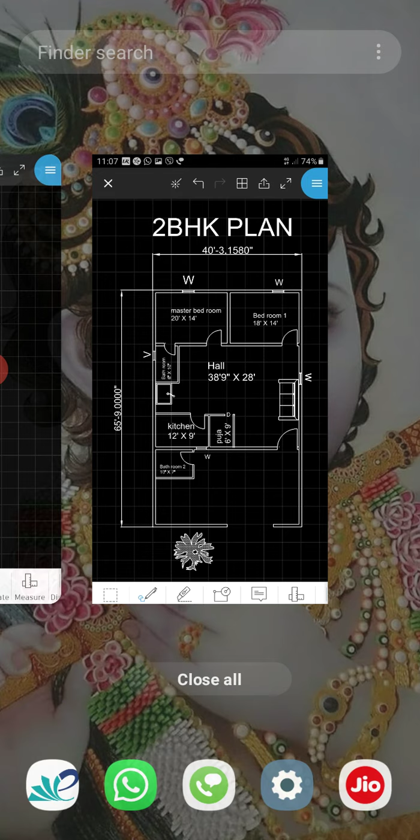Go to draw option, choose rectangle, 40 feet 3 inches by 65 feet 9 inches. Delete. Go to draw option again with the same dimension.

Now provide wall thickness by offset. Here give the dimension 9 inches. Select the object, go to offset, provide 9 inches wall thickness.

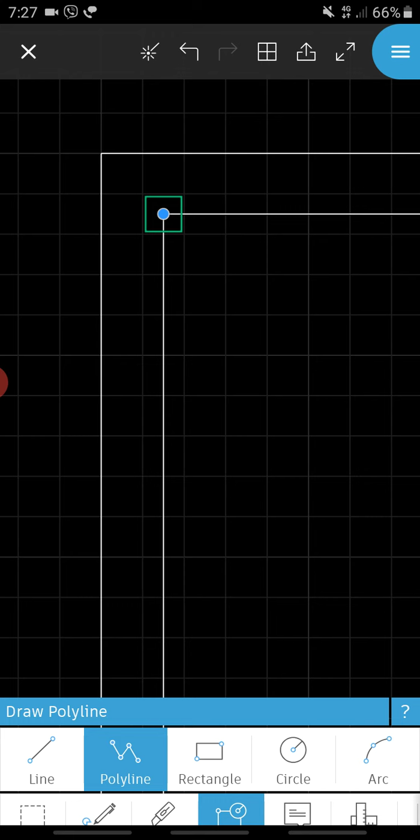Next, we have to choose master bedroom dimension 20 feet by 14 feet. Go to draw option, select polyline. Here vertical dimension is 14 feet 0 inches.

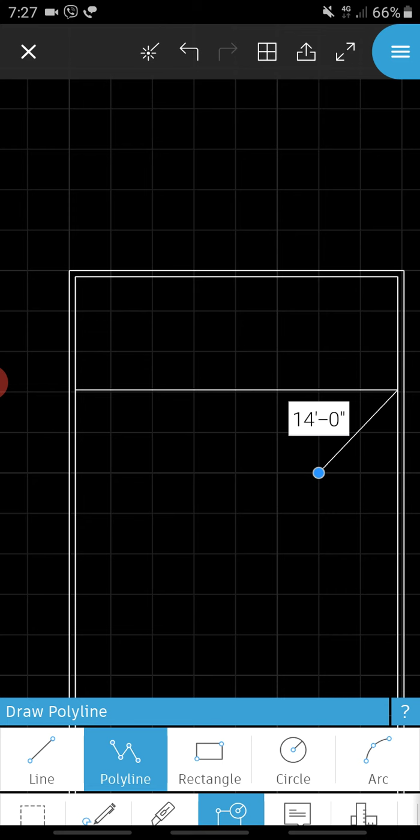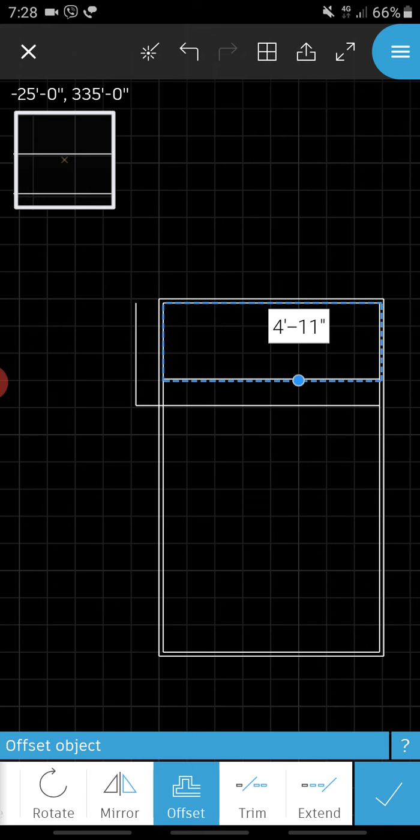Go to quick trim option, trim this line, and select the object. By offset we provide the wall thickness here. You have to delete, select the object. By offset provide wall thickness of 9 inches, and also select.

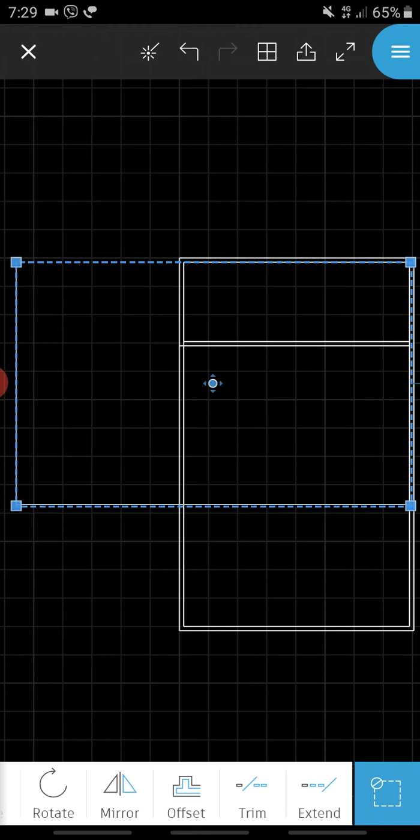So we have to take 28 feet 0 inches. Let's provide the same wall thickness. Let's take offset, provide 9 inches wall thickness.

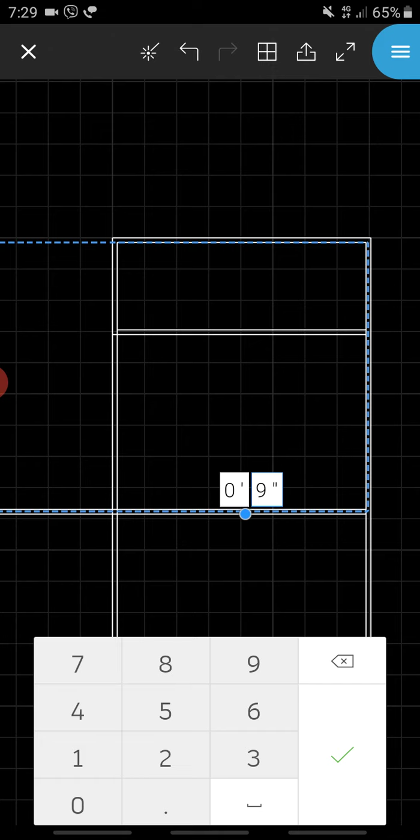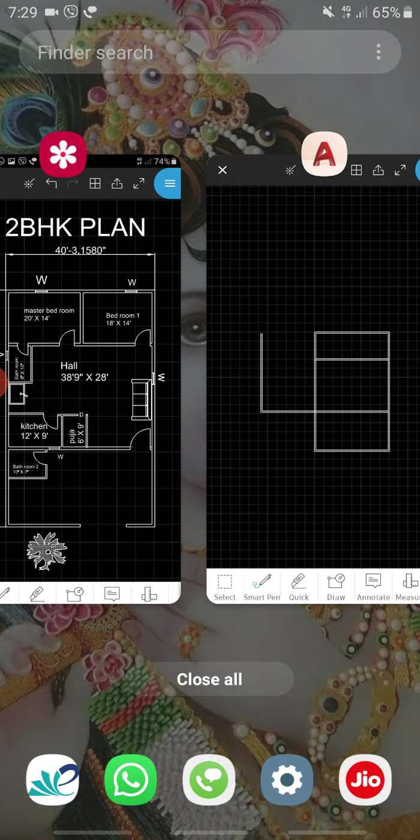Next, we have to draw the rooms. Let's provide more rooms. Master bedroom 20 feet by 14 feet. We have to provide master bedroom. Go to draw option, select polyline.

From this corner point give the dimension 20 feet, it's a horizontal dimension, 0 inches. Vertical dimension is 14 feet.

Next, quick trim, remove this line. By offset let's provide wall thickness here. Select this object, go to offset, provide 9 inches thickness of wall.

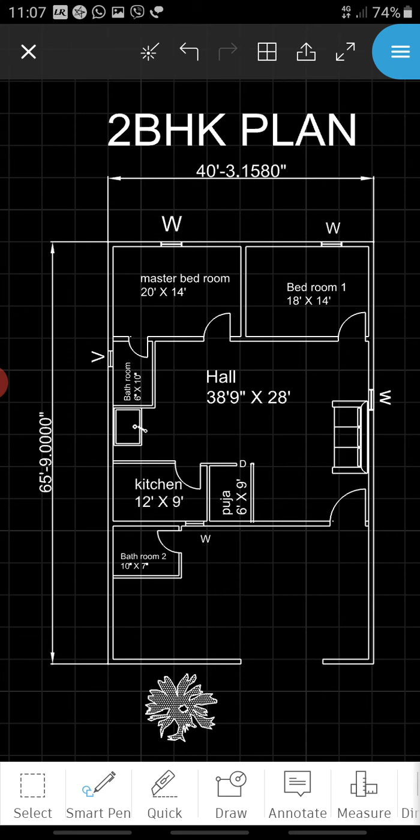Next, let's check our plan. Here is bathroom 1, 6 feet by 10 feet.

Go to draw option, select polyline. From this corner point onwards, give the dimension 6 feet, it's a horizontal dimension. From vertical it's 10 feet.

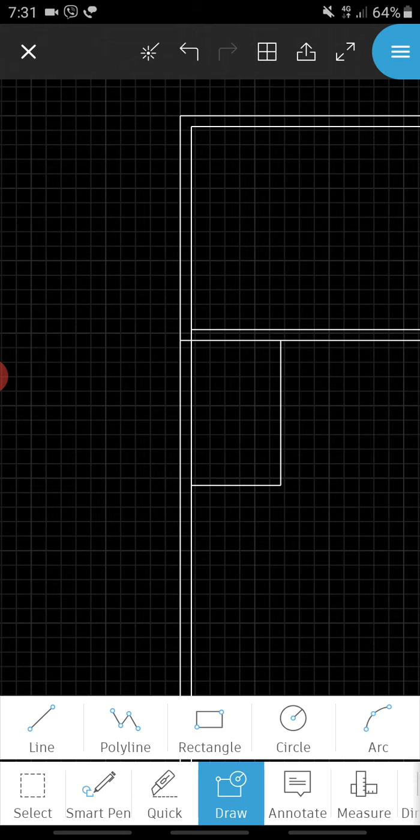By offset let's provide wall thickness. For bathroom, 0 feet 4.5 inch. It's a partition wall only.

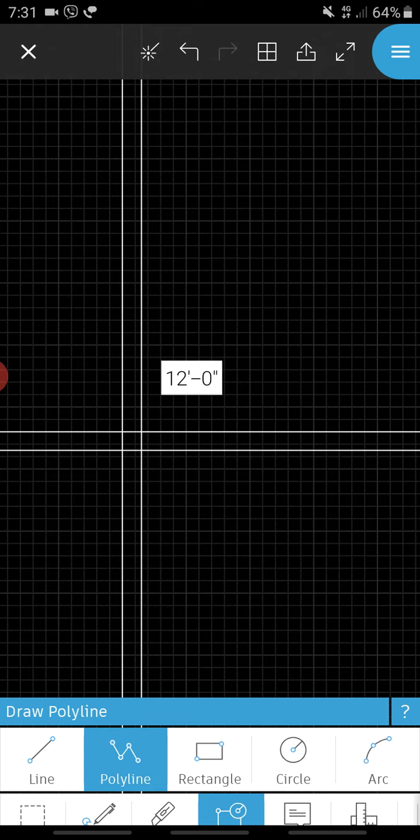Okay, go to draw option, select polyline. From this corner point onwards, 12 feet. Horizontal dimension is 12 feet 0 inches, and the vertical is 9 feet 0 inches. Okay.

Next, go to polyline, from this point onwards join this line. Sorry, here we have some error, so remove this line. Go to draw option, go to polyline.

By offset we have to provide wall thickness. Go to back, select this line, go to offset, for kitchen 4.5 inch. Let's give wall thickness here too.

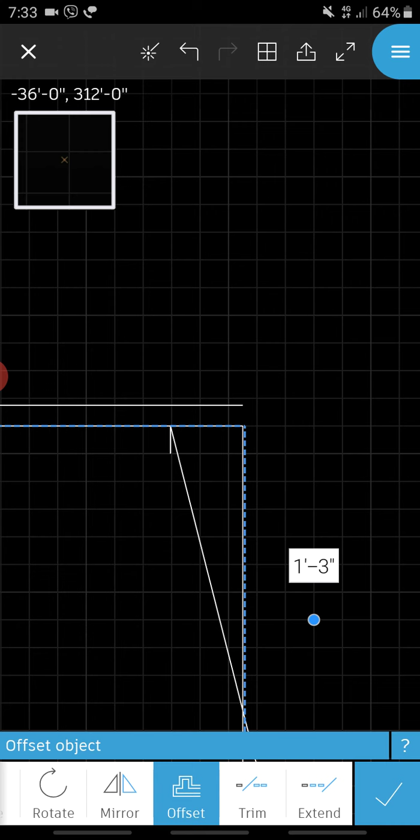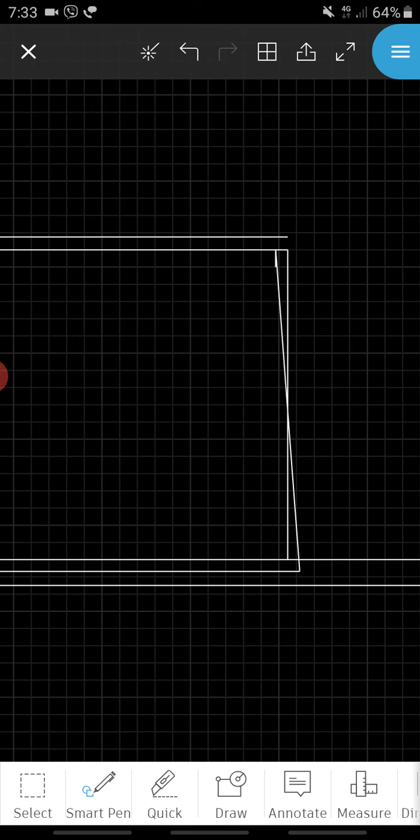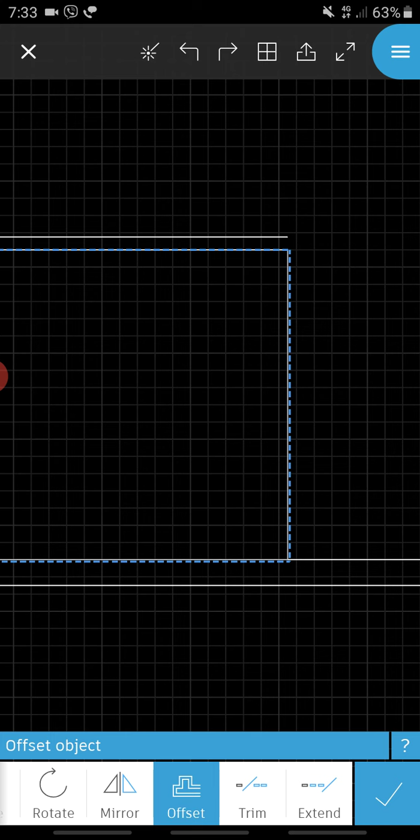Here is a small error. No, go to back. Select this object, go to offset. Offset 4.5 inch.

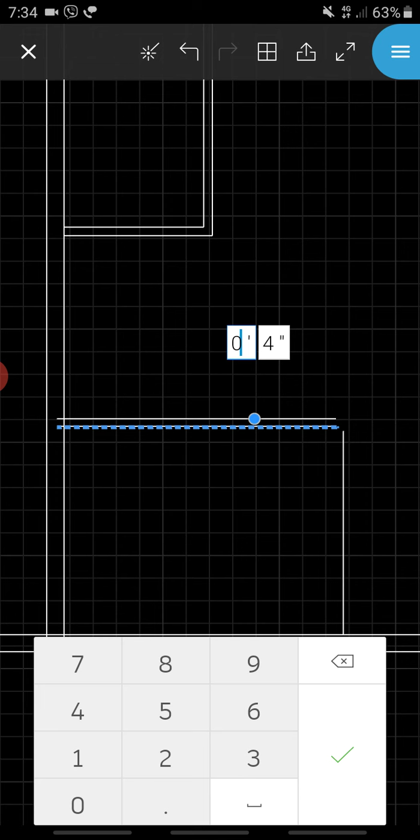Here is a small error, okay we can check it. Extend this line 4.5 inch, so remove this line, provide this line for offset 4.5 inch. Offset 4.5 inch. Delete this one.

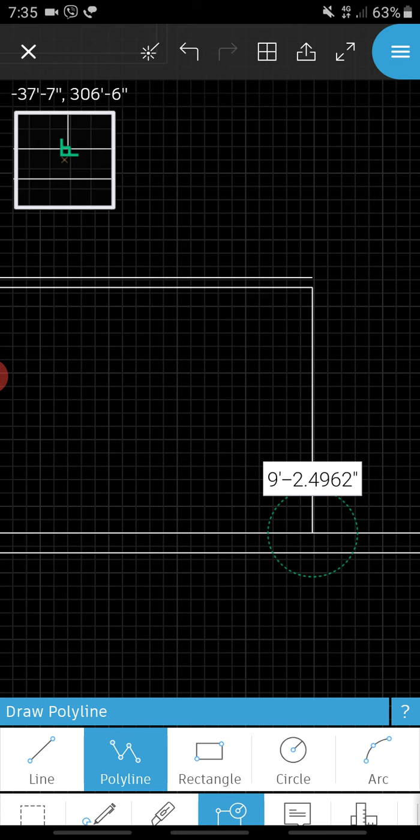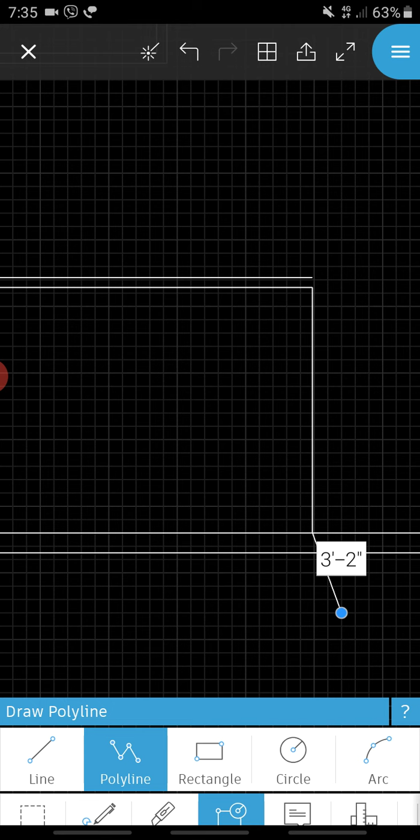Go to draw option, select polyline. Select this object, take offset, it's 4.5 inch. Next, go to line command, 4.5 inch. Join these two lines.

Next, we have to draw puja room, let's check dimension: 6 feet by 9 feet. Go to draw option, select polyline.

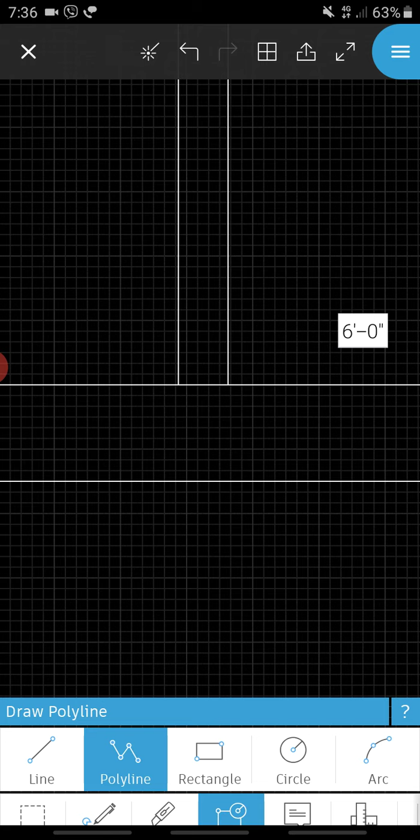6 feet by 9 feet 0 inches. Go to polyline.

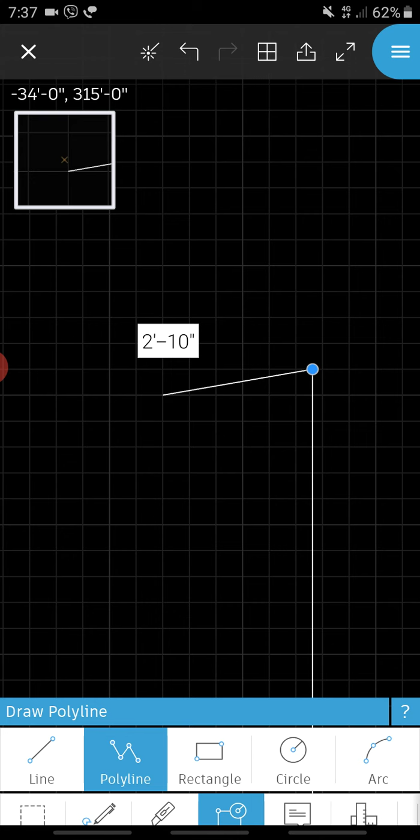Take offset 4.5 inches. Select this object, take offset, give 4.5 inch for puja room.

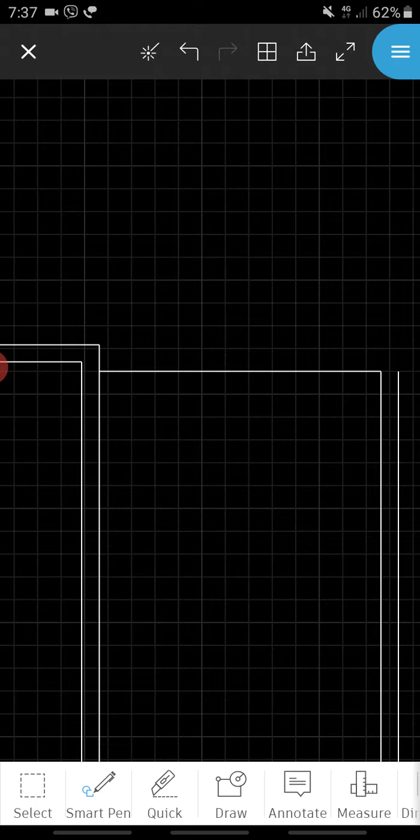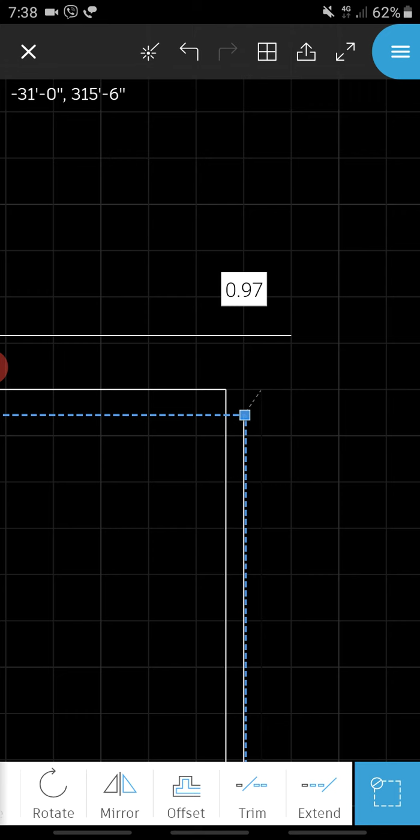Next, go to draw line command, join these two lines. Go to draw option, select line command, choose this end point, touch these 2 points. Next, another room is there.

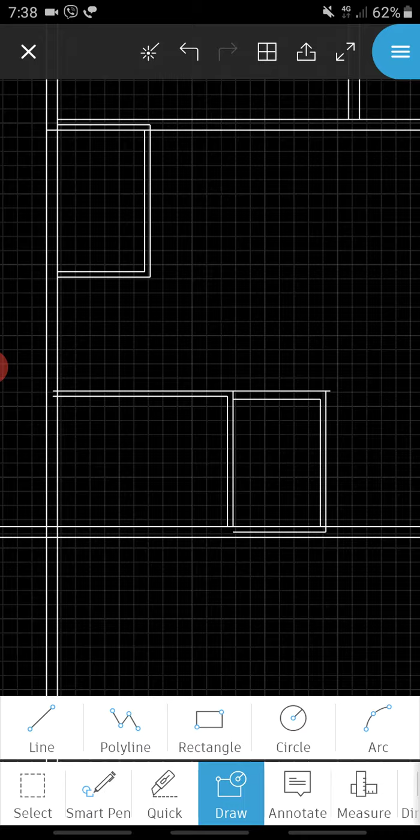It's bathroom 2. Check the bathroom 2 dimension: it is 10 feet by 7 feet. Now we have to draw.

Select draw option, polyline. From horizontal it's 10 feet 0 inches by, from vertical it's 7 feet.

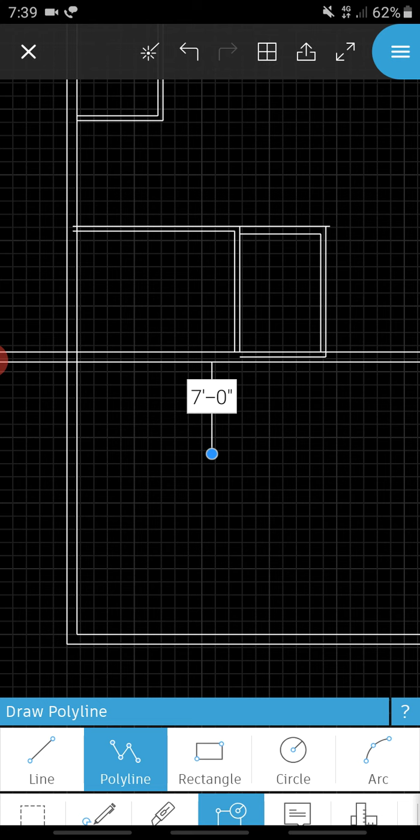Let's take offset. Provide 0 feet 4.5 inch. Okay, all the rooms are drawn.

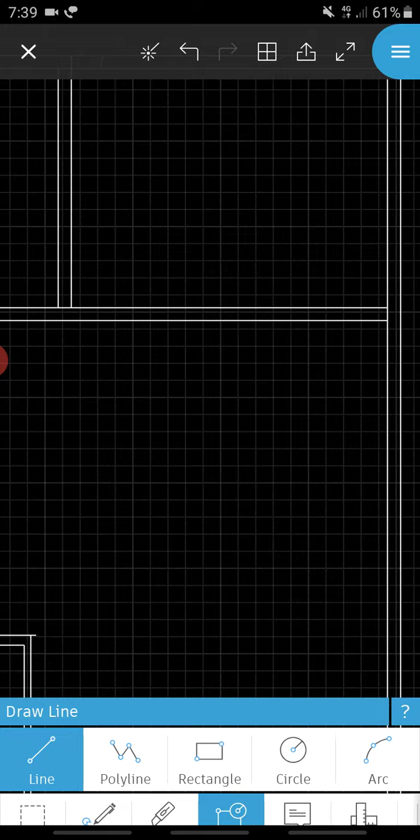Now let's provide doors. Go to draw option, select line command. We have to provide the doors. Nine inches, 0.

Let's take offset. Go to offset. Let's give this door a 3 feet distance. Mainly 3 feet is the providing distance of door.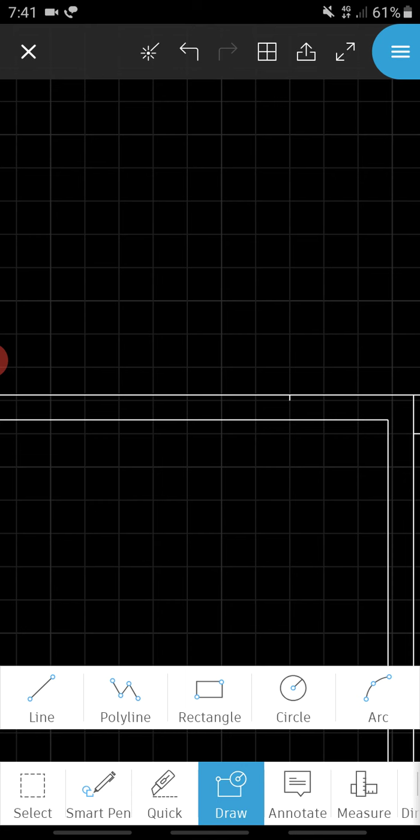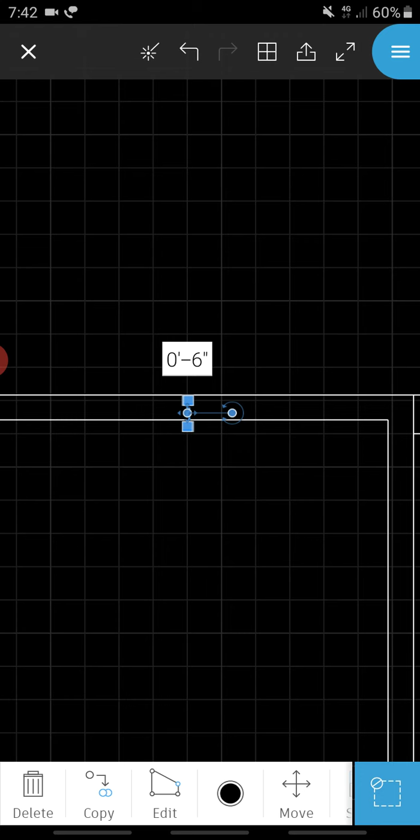Go to draw option, line command, choose one point, .5 feet. Let's take offset for kitchen. Let's take offset, kitchen also, give 2.5 feet.

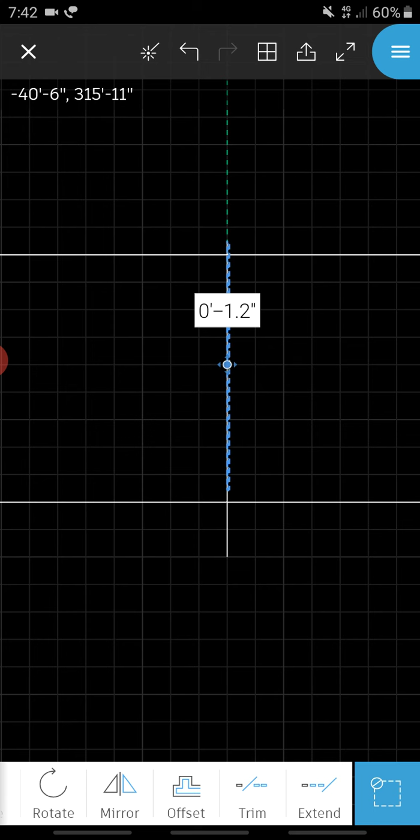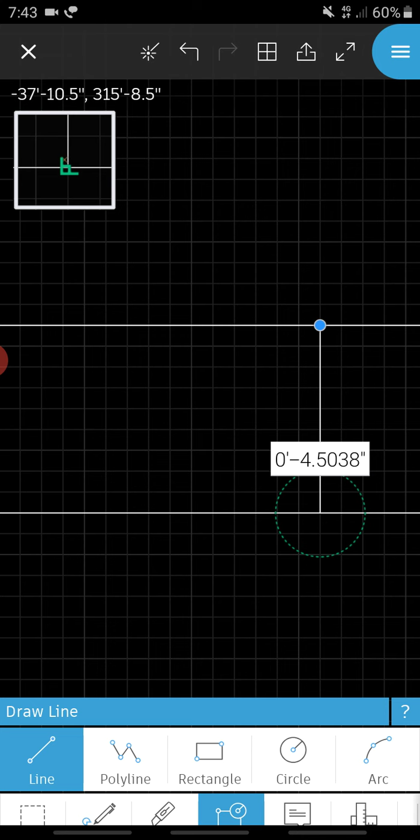Delete this one. Go to draw option, select line, .5. Let's take offset, 2.5 feet.

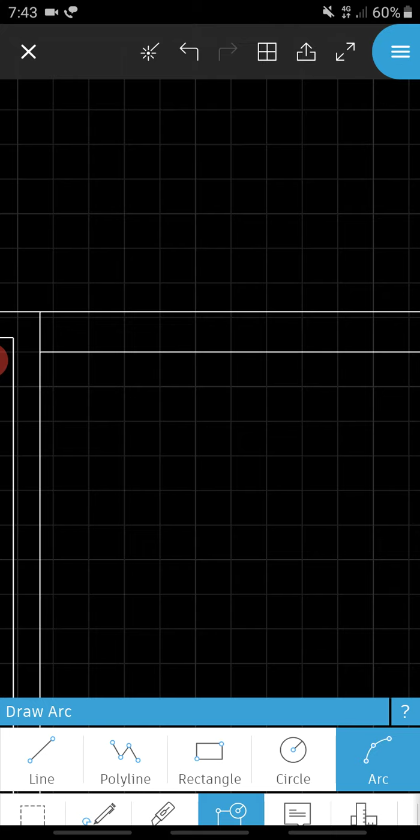It is not sufficient. Go to draw option, select line. Go to draw option, select line.

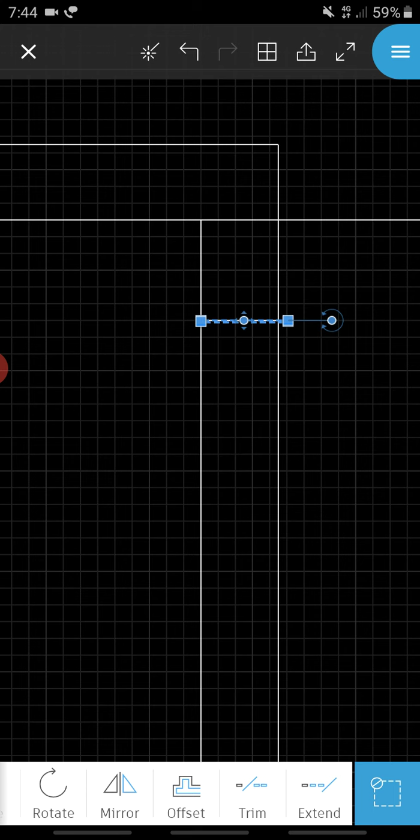Next we have to trim all the unnecessary lines. Go to quick trim, trim unnecessary lines.

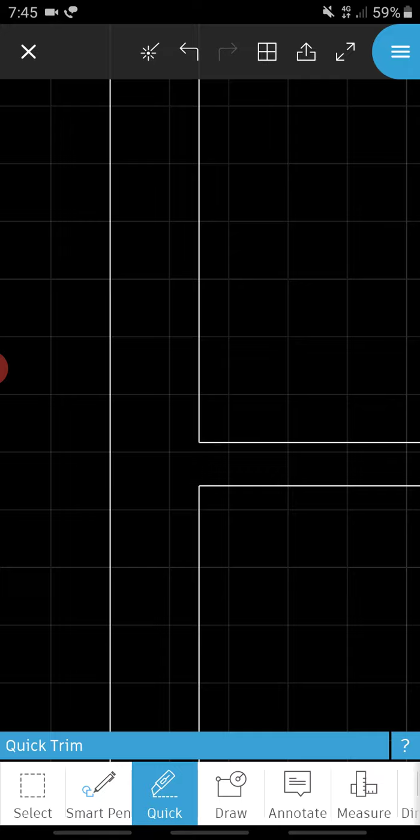Go to quick trim, these lines, quick trim option.

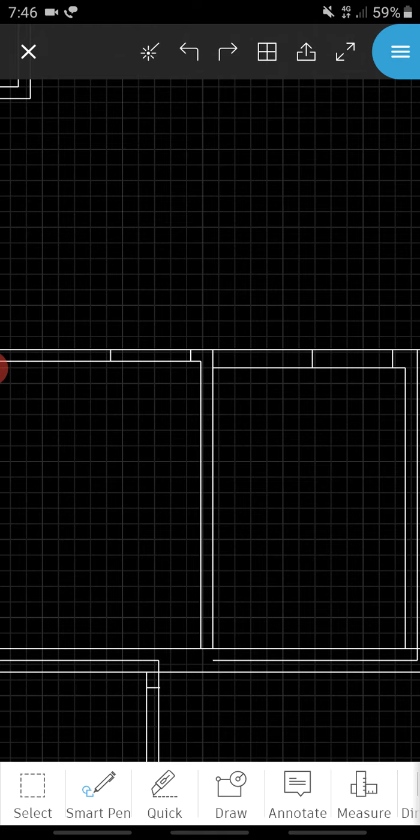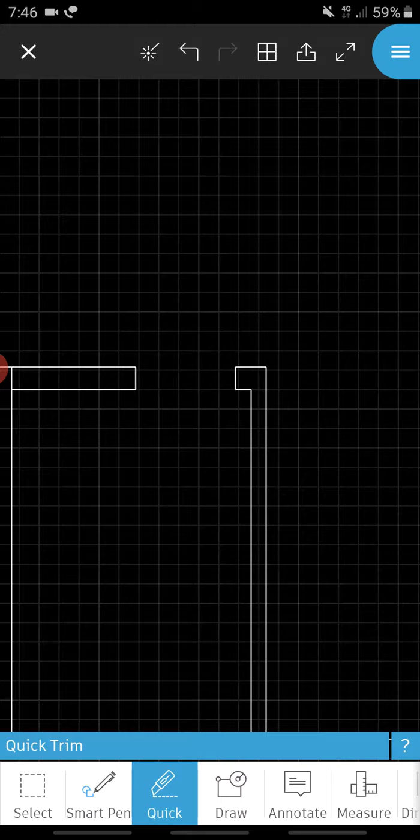Next, quick trim this line. Here is one unwanted line, trim that line. Another line.

Dimensioning is 20 feet by 20 feet by 14 feet. Okay, absolutely, 20 feet by... for the 'by' symbol we have to use capital X. 20 feet by 14 feet.

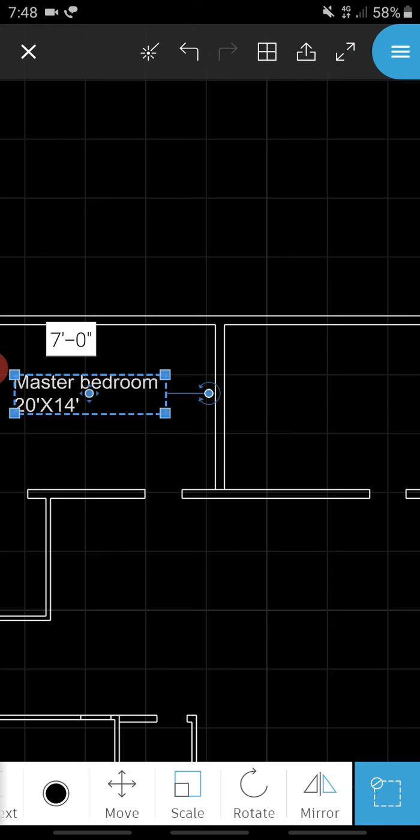It's bedroom 1. Go to annotate, text, bedroom 1. Dimensioning is 18 feet by 14 feet. For the 'by' symbol we have to use capital X. 14 feet.

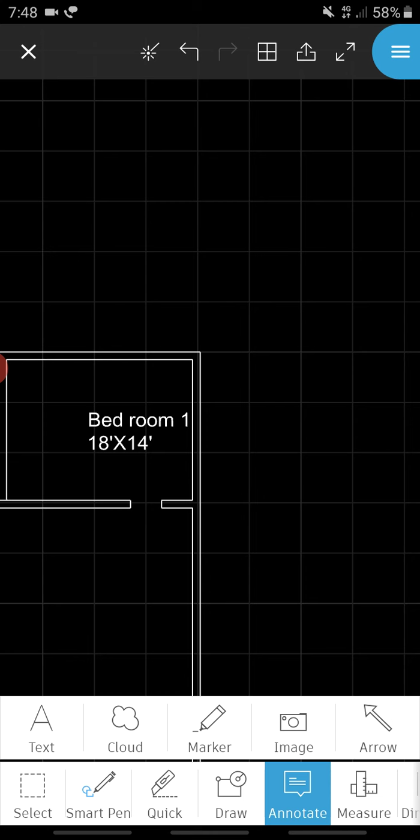Done. Next, it's a hall. Go to annotate, text, it's a hall. Dimensioning 38 feet 9 inches by 28 feet. Done.

It is a bathroom. Go to annotate text, bathroom 1. Dimensioning is 6 feet by 10 feet.

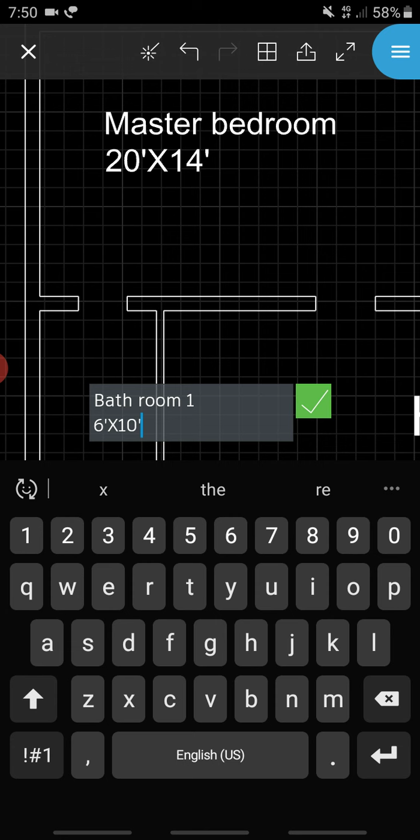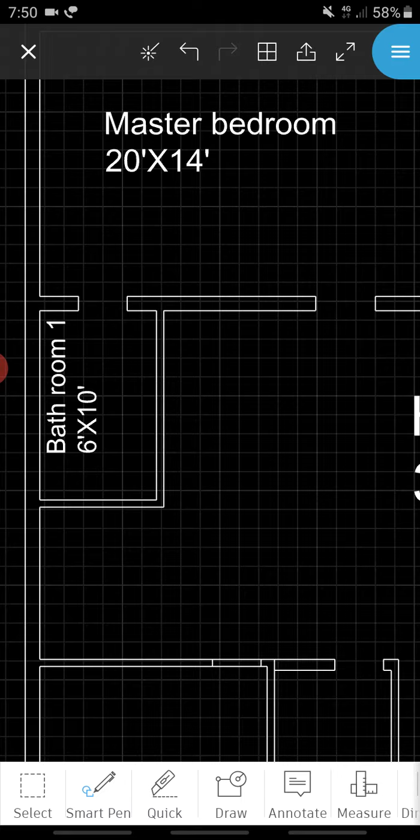Use scale for enlarging. Okay. Now go to annotate, it's a kitchen room. Okay, it is kitchen. Dimensioning of kitchen is 12 feet by 9 feet. We have to mention 12 feet by 9 feet.

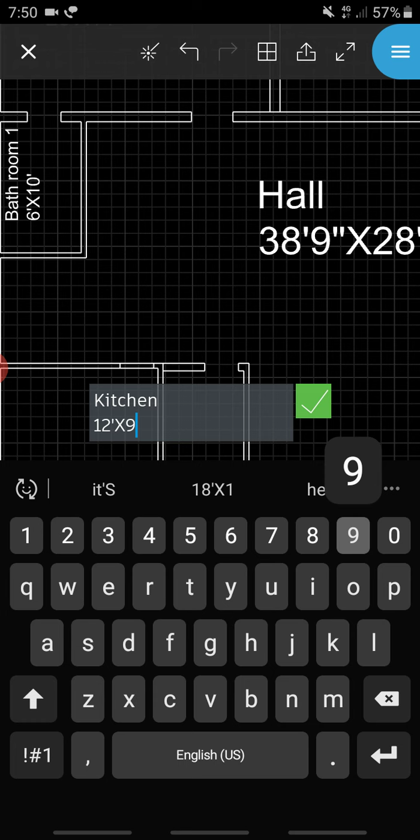Go to annotate text. It's a puja room. Dimensioning of puja is 6 feet by 9 feet.

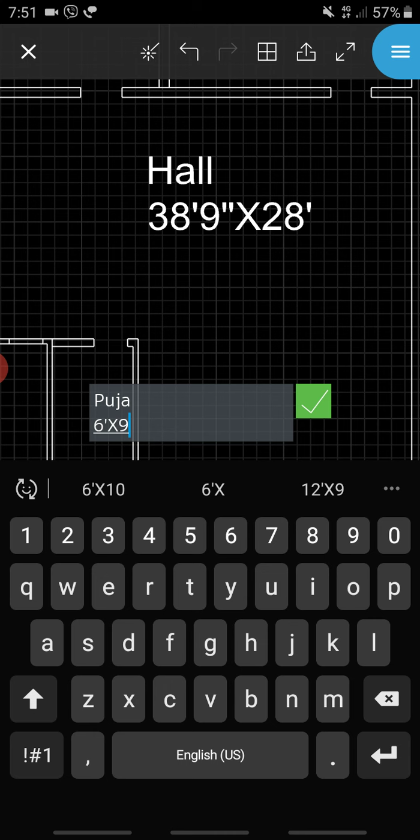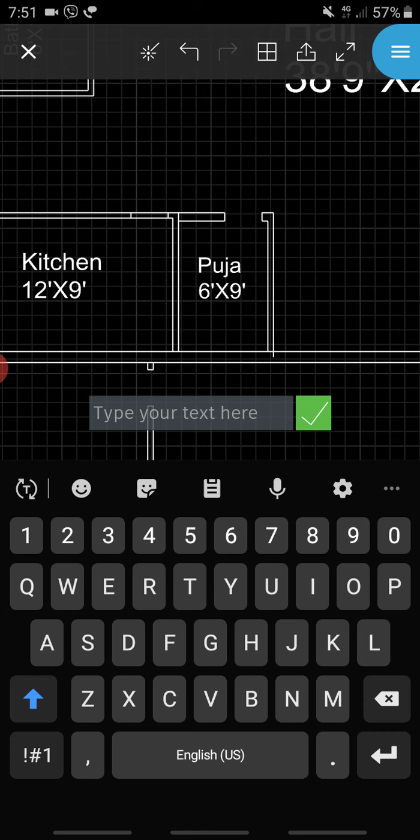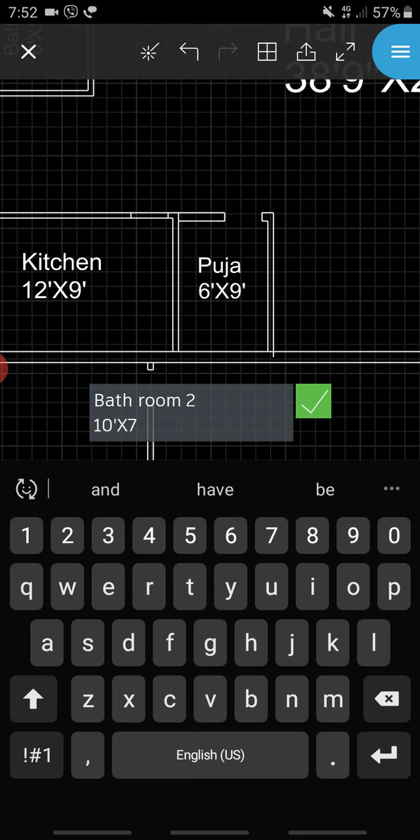It's bathroom 2. Go to annotate text, bathroom 2. Dimensioning 10 feet by 7 feet.

Scale, go to scale. Next, from entrance, here we have to provide the door. Go to draw option, select line.

Nine inches. Let's take offset. Give 3 feet 0 inches. Trim option, trim these lines.

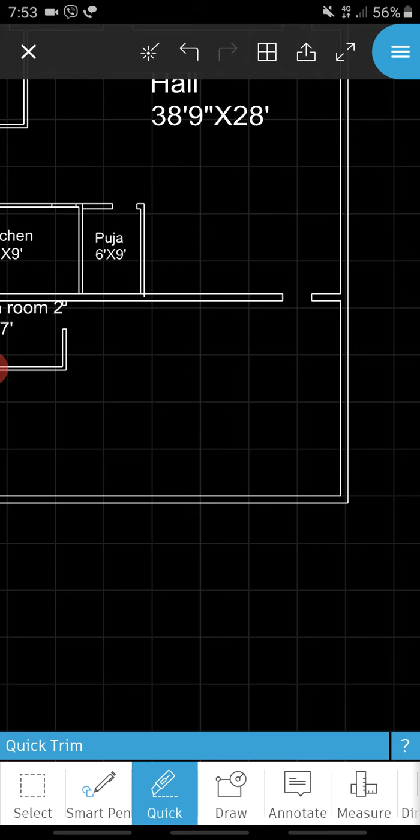Next, here we have to provide one big gate behind the plan. Let's provide a big gate here. Go to draw option, select line.

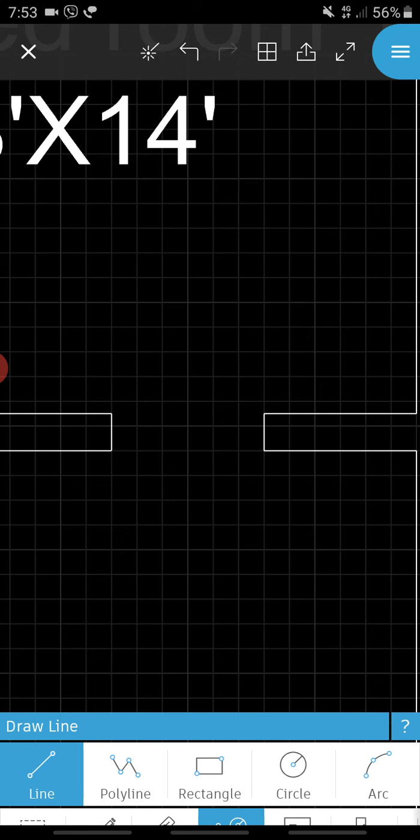Now draw the line. Now, by using quick trim, remove the unwanted lines.

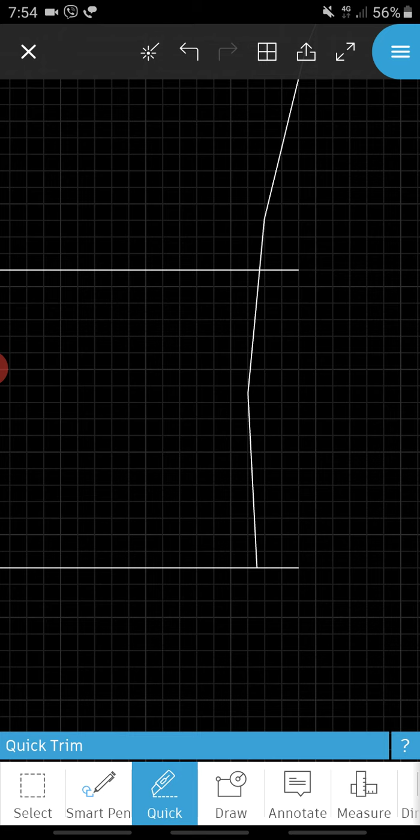By this procedure, follow for all the doors.

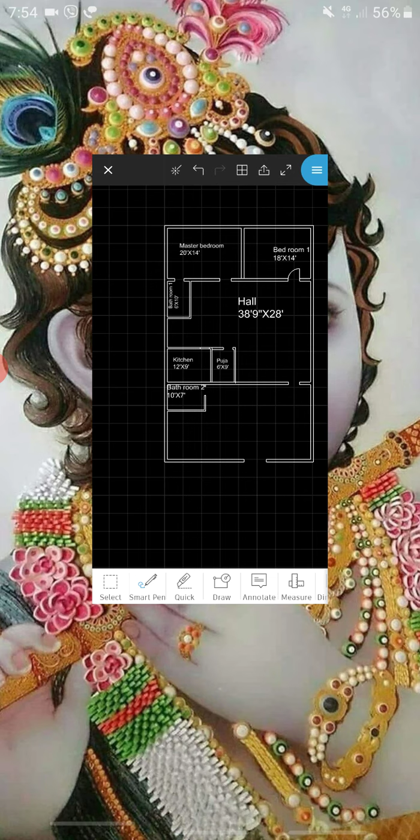Now once we have to check the previous plan. In front there is, next there is a window. We have to draw one window. In the hall there is a window.

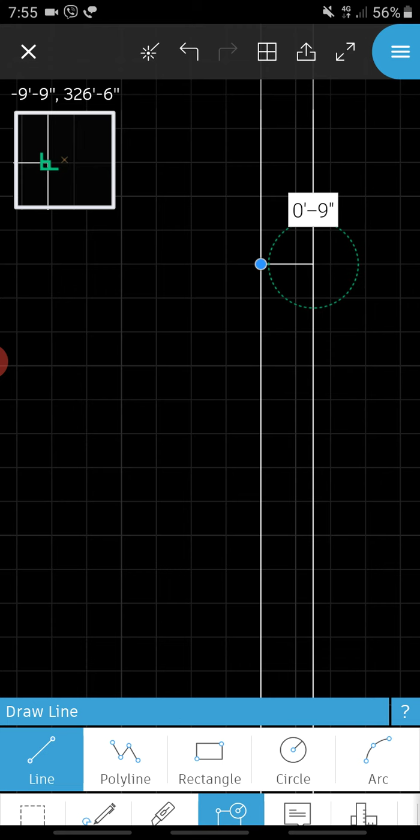Go to line option, line command, select that line, let's take offset. For the window, let's give around 3.2 feet. Approximately we have to provide 3.2 feet for the window.

Go to draw option, it is a symbol of window. Next.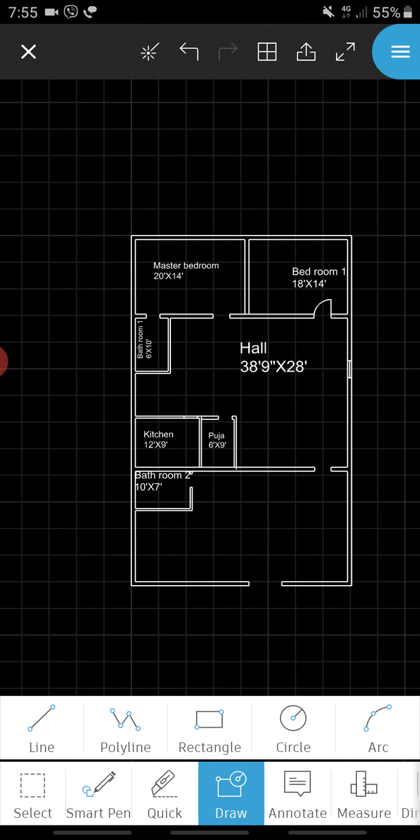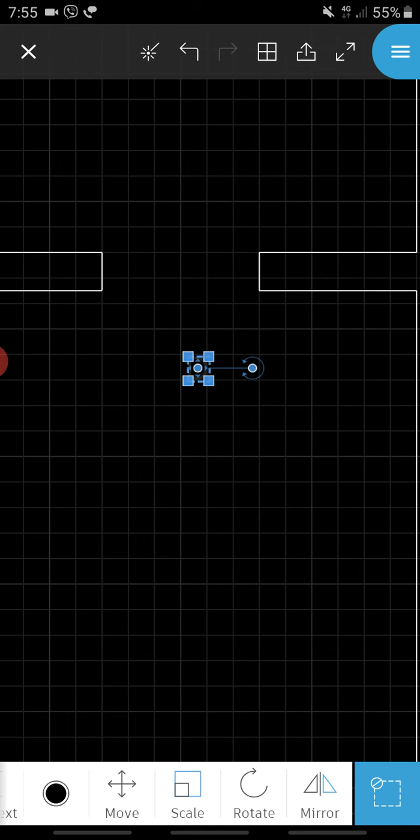Go to annotate, D for door, go to scale, in this way we have to provide the doors to all. It is the main gate. Sorry, go to annotate, text, it is the G, which stands for gate.

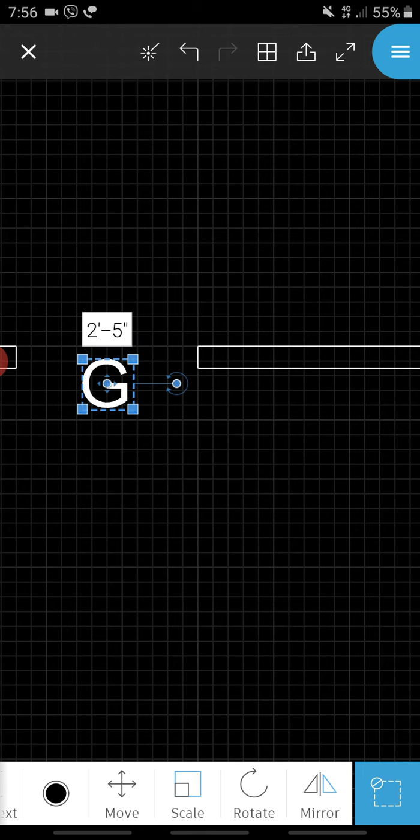For increasing the size of this letter, use scale. It's a gate.

Next, it's a 2 BHK plan. Mention it. Go to annotate text, it's a 2 BHK plan.

Select this object. It's unnecessary. Improve the scale.

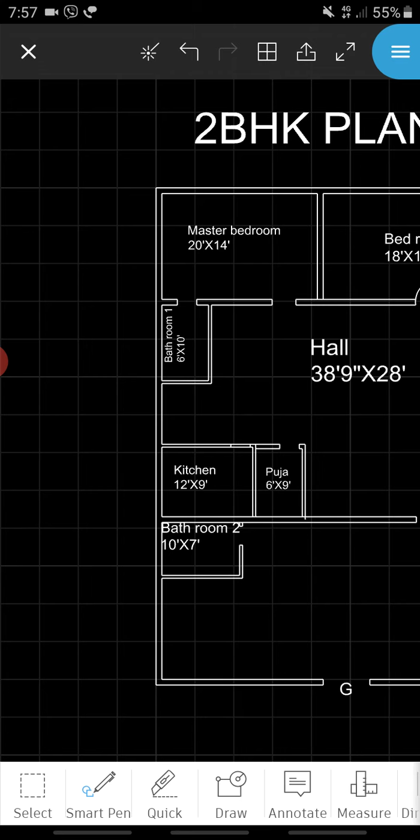In this place we have to provide it. Now go to dimension, we provide the dimension. Select the edge points in vertical direction.

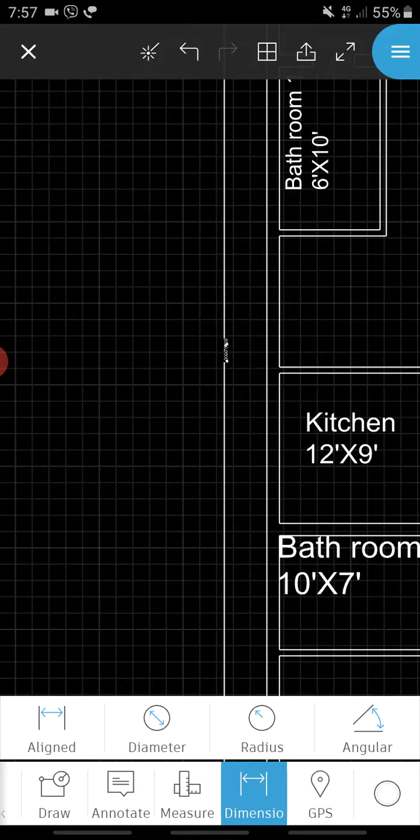Its exact dimension is 65 feet by 9 inches. It's a vertical dimension. Now we have to provide a horizontal dimension. Go to aligned dimension, choose the first point and last point.

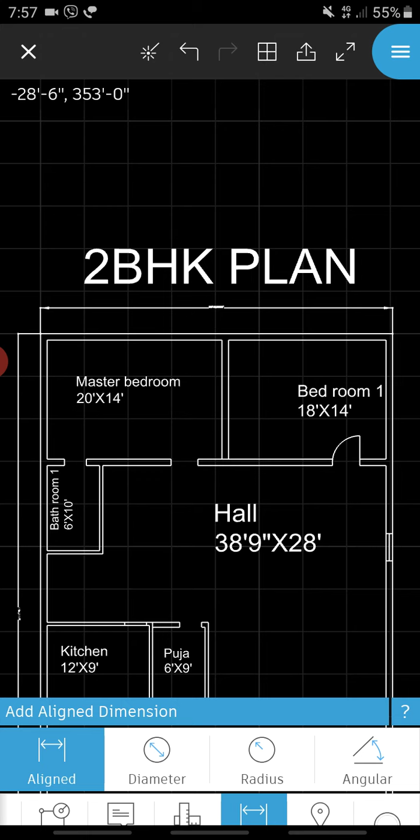40 feet 3 inches. Okay, it is the plan which we have to draw. And check for previous plan.

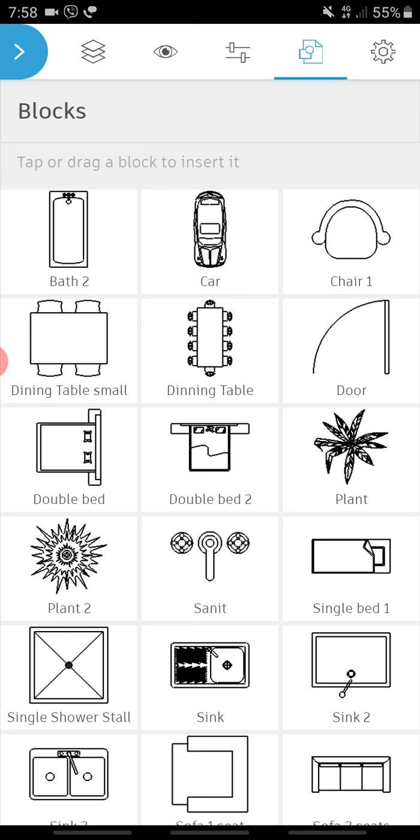There is a tree beside the plan. Now we have to select one tree. It's a tree symbol, we have to provide it in this direction. It's a tree.